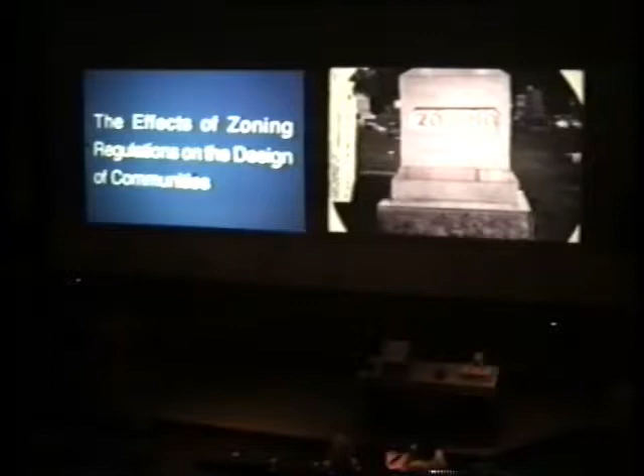The key is to understand that one of the major tools is going to be a zoning tool - not only a visual tool, but a way to encourage the kinds of actions we want to have happen.

Now, let me see if I can get this thing... I'm going to go back and see if I can get this straight. There, I got it. This is the vision.

The 1950s - kind of what we were supposed to become, and what we are. There's now more cars in America, probably as you all know, than there are drivers. This was kind of the image after the war of the suburban American vision.

I suspect the majority of you grew up in this vision. I ask undergraduate students - I teach one of those classes a year - what's a single word that describes the area in which you grew up? And that word is boring. To the point where I'd argue the majority of people who moved to the suburbs did not move there for the kids - they actually moved there for themselves.

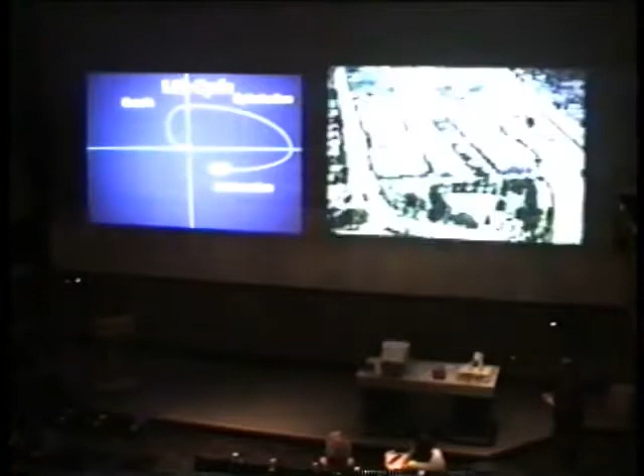Now, here's a classic for you. We work with a lot of major team structures across the country, and one organization we work with a lot is Cooper Carry. This is Boca Raton before—typical American shopping center, classic—and that's Boca Raton afterwards.

What happened is they leveled it. Both shopping centers, 17 to 19 years, leveled—they die after that period of time, and then start over again. Now they've got a main street, a plaza, retail at the bottom with housing above, retail at the bottom with offices above. It has transformed itself from the Euclidean zone of a single use into a multi-use place.

You're going to find that the majority of your work in your careers, I suspect, should be involved not with Greenfield projects but with what we call retrofitting. I think that's what's interesting about the complex geometry of deconstructivism. The only redeeming factor I can say about deconstructivism is that you folks will understand the complex geometries better than lots of other people will.

Now, the typical planning vision process we go through starts with an analysis of the physical, economic, and social—what we call the biography of the past. That's pretty normal, a clear biography of the past. But the biography of the past cannot exclude you—it's as important to understand where you came from and how you feel and what your background is as it is to understand the place you are building, designing, or analyzing.

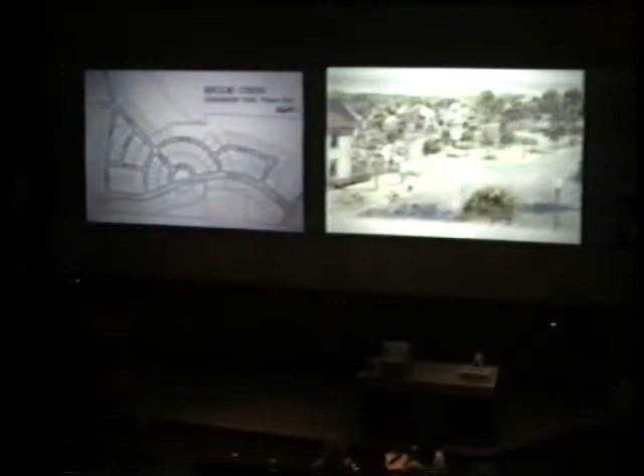You've got the right vision, you meet the road structure, we meet the street regulating plan, and we're on our way. This is the first phase of it, some of the first sketches that were done, and it's under construction. Now, what's fascinating about this one is that it took 9 months—7 days to complete the design, 3 weeks to do the rest of the regulation, and within 9 months we had it fully funded from the bank and under construction. 9 months.

Why does that happen? It happened because it was a collective vision of the folks who were there. And the banks felt perfectly comfortable with it because it seemed to relate directly, and we had people who were willing to understand that the design vocabulary wasn't something you just pass off.

It's wonderful for us to see the first phases of stuff go up, and of course there's nothing better than to see lots sold. That's really the best part of it. At different times of the year—some of these early plans were shot about a year and a half ago.

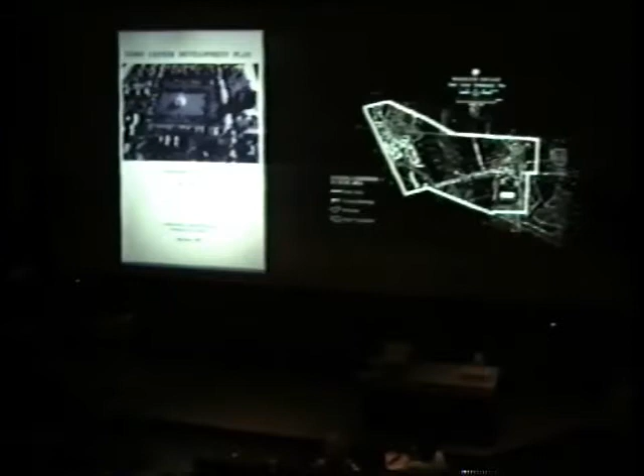Now I want to show you another one, cruder. This is really crude, like a $10,000 job. Slam dunk, this one. I mean, not all our clients are the Wilson Corporation. We take on a lot of clients who come to us and say, hey, we've got $5,000 or $10,000, and I say, well, okay, we'll take this one, or if the project is interesting—and you guys know that because you do all these wonderful charrettes here as well.

This was the one for Washington Township. Here was their vision. Now, those of you who've been to Lake Forest, Illinois, know what that place is like—the values there scored a 5.6. And they loved that place. They'd never seen it, but they knew intuitively that they really liked it.

And then there was some of the 6.3, which is a kind of new shopping village. And then, of course, the big one was the 8.7, which was the park. Again, you can always see that open spaces become critical, because the values of these will consistently begin to go up.

So what we did is a very simple set of things, but look at the comparison on the left-hand screen here. If you can actually see it, both of those images are the new stuff they've been building. One's a -2, one's a -2.7, and the other's a -1.6. Now, they built this stuff—this is in their code—and they did the survey, and it came out negative.

Now, what does negative do? Negative creates cognitive pain. When we ask people in sessions afterward, when you gave it a negative score, what's the single strongest emotion you felt? You know what it is? Depression. I feel sad. This place makes me depressed.

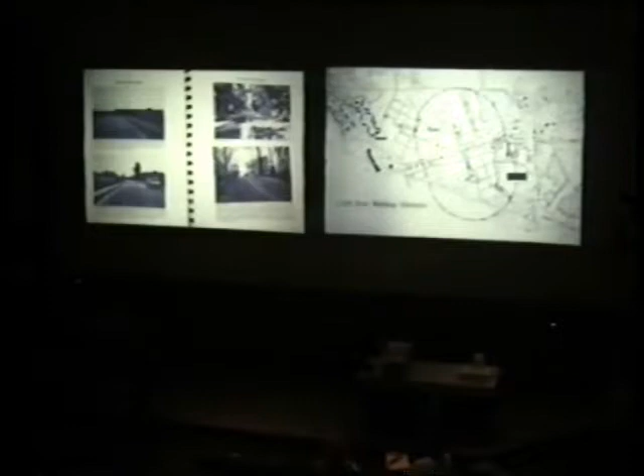So the question is classic as to why. Sometimes I ask audiences, how many of you are on Prozac? And I always get lots of people raising their hands. I think half of America's on Prozac.

But nonetheless, be that as it may—sketches of the preliminary layout, finalization of the design using little models, spiffing it up somewhat. But notice this one, if you will.

In the middle piece up there is their little main street. It dissolves into a square big enough to have a field in it. And what I thought was fascinating is this is a range of housing types, but they also wanted a religious building, a church, at the other end, and they also wanted a cemetery.

Now here's always my litmus test: if you've got a PUD that's got a cemetery in it, it probably is a real community. Do you want to get shipped away to some place to be cremated and set in a field someplace that's not related at all to the places where you've lived and grown up, or the churches where you worship? What happened to cemeteries next to churches? Well, they become parking lots.

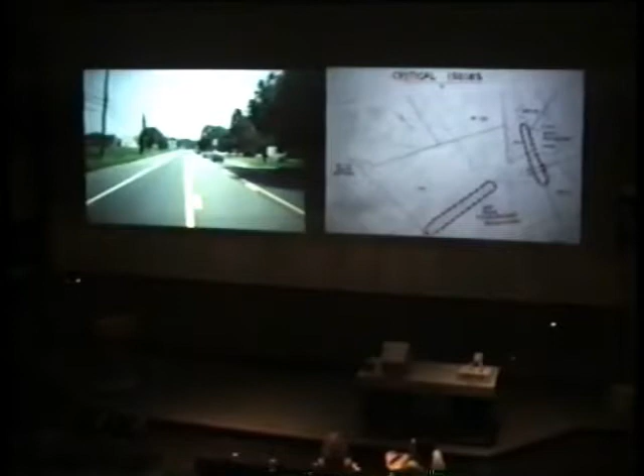So this one is a very simple one. This is the road in front of it, and of course this is a state highway. Now you're into the big hassles with the New Jersey DOT, and of course that was always a good battle.

And what we did on that one is simply a simulation—a computer simulation, before and after. That's all it took, this bottom simulation, to prove to them what that street could become. And we had converts from the New Jersey DOT.

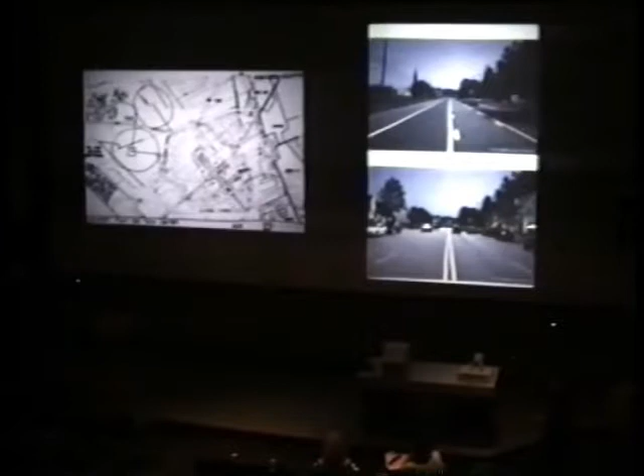Again, that's a computer simulation, and you guys probably know that stuff really well. This is the plan—again, the road structure is laid out, the street structure is laid out, and the fundamental location of the buildings is laid out.

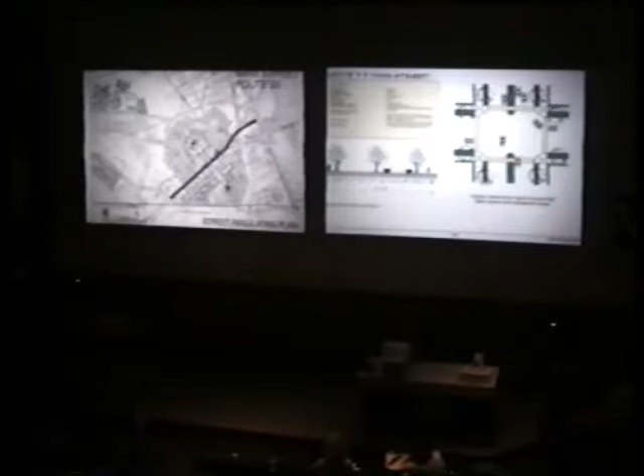Here's the typical ordinance itself. Again, color-coded streets, which are fairly simple and straightforward. This was a cheap document, so we simply did it in black and white. You just color them in to show where you want to go. The various street types are the same plan, done over and over again in the same overall character.

You can see how the street regulating plan evolves and how the streets develop because of that plan. Very narrow streets. We were really interested in very, very narrow streets. This one's in Portland. We liked it, it got really high on the survey rating. It's terrible, people can't pass, but it's the most human street there because cars have to stop to pass each other. In most cases you can't build a street like that because you're supposed to have two fire engines and a third fire engine passing at the same time for that street to work.

I was just blown away today when I came in here on a highway, 76 or 67, whichever it was. It looked like an airport runway, like the Cincinnati airport. And it had no cars on it, maybe two. I'm going, why are they widening this thing? Why are we wasting money on a road we don't need? Why?

Well, I'll say it's depression thinking, but on the other hand, guys like Rick Chellman are really making big moves with ITE and AASHTO to get these road standards changed. And it's happening, you can see it through here.

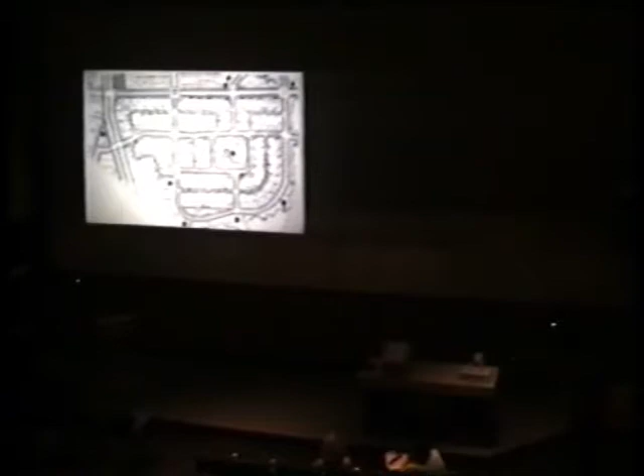That's the typical kind of boulevard section. And of course the ubiquitous alleys—we don't do anything without alleys anymore because you get the best streetscape off of alleys across the board. Even trying to deal with the highway system in terms of creating a boulevard, the highway was always a very critical one. Then I'll start to actually lay out some of the actual neighborhoods.

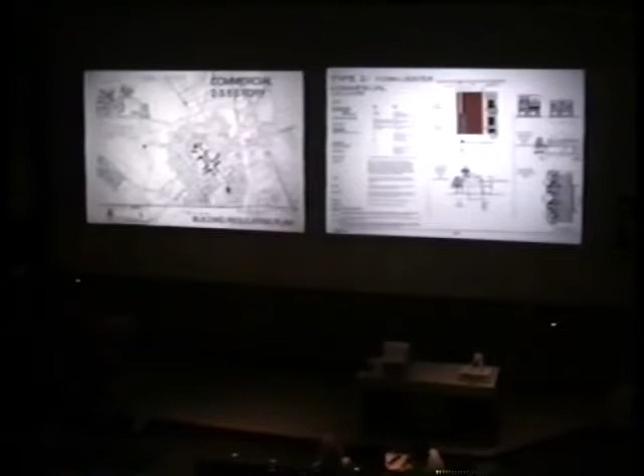It does have some of these numbers in it by nature, but you also begin to see these diagrams where you concentrate the highest density in the center. You see the building regulations here, and this was the commercial component. The whole thing was done in about 40 pages, lock, stock, and barrel, including the townhouse plans.

If you look at this carefully, you can do townhouses or garden apartments—several building types on the same street. It's not Euclidean where just one building type fits on a certain street; you can do multiple overlays onto a single street. The regulations look as simple as this, all one page, and you refer back to the design vocabulary. So that's a really neat part of it.

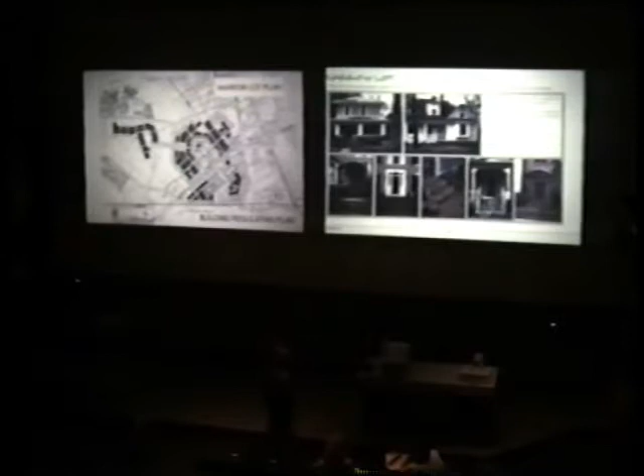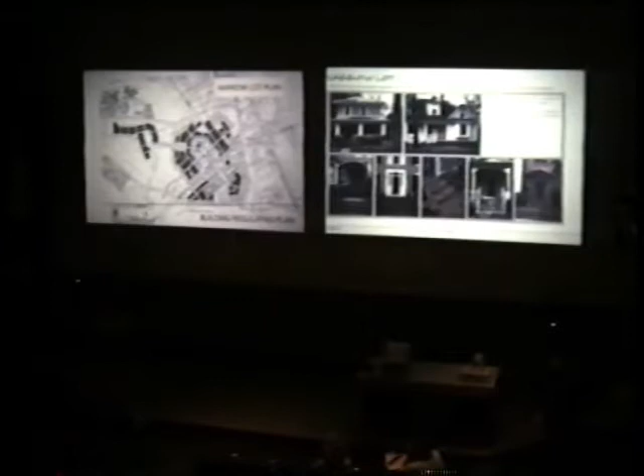You can see the narrow lot lines also fit where townhouses could work. It allows the market—if we get a great street with great trees and great sidewalks, and the market says it's better to move to townhouses than small single-family houses, why should we regulate what the developing community and the market says you should have? As long as you have great streets with great sidewalks, who cares, as long as we get the quality we want. So that becomes a slightly different way of looking at it.

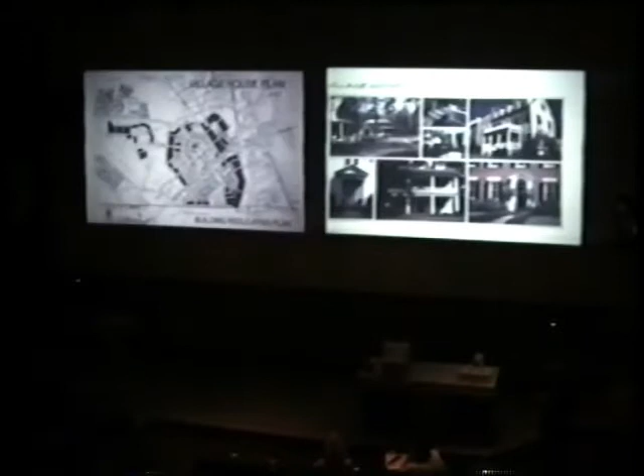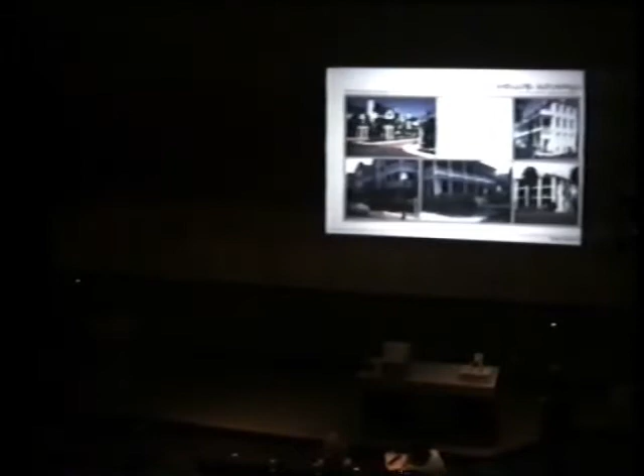They're always relatively simple in their overall configuration for each building type. The whole thing just goes on in this kind of configuration, whether it's senior citizens housing or whatever. What's nice is it all falls into a fairly simple, straightforward process that a lot of architects can then play with—it gives the architects creativity.

Now, you remember that top-rated image, that open space top-rated image? You can see that part of the open space now in the plan. So what happened is the people who actually rated these images can now see that image realized in their plan.

I don't see myself as a planner anymore. I simply see myself as a facilitator of other people's vision. We're just there to help them put it into place, and that's what I'm asking you guys to become involved in—giving the architects the most flexibility in developing the actual civic buildings.

I want to show you another project. This one was fascinating. We just finished Midtown Atlanta. Now, those of you who've been there know it's two-thirds empty parking lots with some very good signature high-rise buildings, but it's really a terrible place.

We went through a visioning process with them, but what was interesting was our working group included the chairman of the Federal Reserve Bank, every major developer, all the major bankers in town, and every major mover and shaker. We went out to the public, 2,700 people participated in the survey, and we held one intensive charrette that boiled down into a final set of design plans.

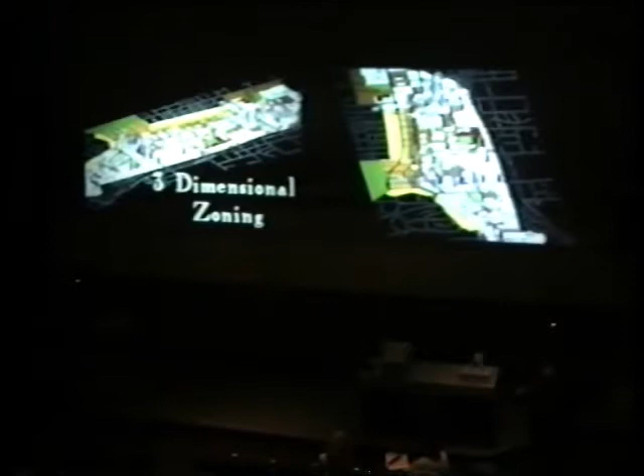But we're dealing with some fairly substantial infills of structures. So what we're doing now, primarily in Microstation with the major road structures laid out, it really starts to lay out where the various land uses and the volume into which things can be built, and then relates that back to a design vocabulary.

Starting first with the basic structure, here's two things we developed which I think are very important. This map essentially is what we call a susceptibility to change map. And if you remember nothing else from this lecture, the most important thing I can tell you is the development of susceptibility to change mapping.

Why is susceptibility to change mapping so critical? When we say susceptibility to change, we mean what things will change in the next 40 years. Top on our hit list, of course, is parking lots. There will be no more parking lots in the year 2050, so parking lots are highly susceptible to change.

One-story buildings are highly susceptible to change. Existing deteriorated structures are highly susceptible to change. Then you have highly, medium, low, and not changeable categories.

So you wind up with a map that has these four characteristics on it, and then you three-dimensionally volumetric all of the buildings which are going to stay, and you take this back to the community and say, do you agree with this? That's all the buildings in Midtown that the group agreed would stay by the year 2050.

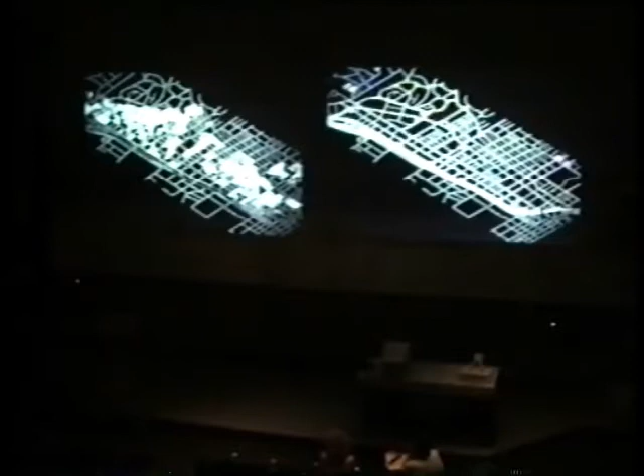Now what do we do with the rest of them? Well, obviously you go back to the visioning process, and that began to pull out things like major structure, where the major roads were going to go, where the major sidewalk configurations were going to be located, and then you started to infill it, primarily with housing.

All the yellow and brown here are low-density housing. They kept it because we went back to their maps and they said housing, housing, housing, and here was the configuration of the housing types. So for the first time you can see in this photograph three variations on the types of low-density housing they're looking for and where they're actually located in the plan.

So not only could you see them, but you could also see the volumetrics, and the volumetrics could relate to a photograph. So here's the synthesis that begins to occur by putting several of these kinds of pieces together.

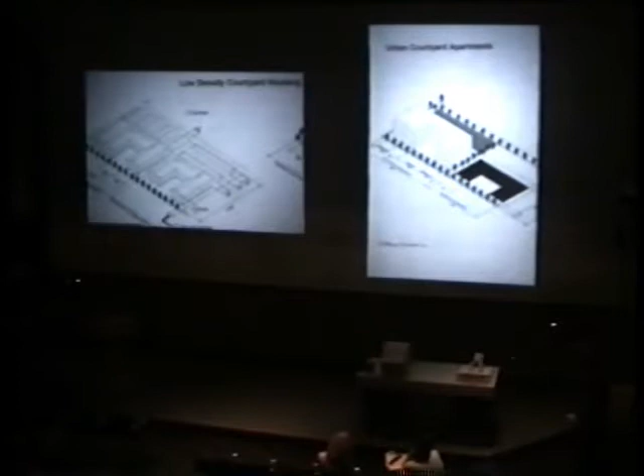And then, of course, you do these kind of diagrams - the typical floor plate diagrams, as simple as you can conceivably get. Here's the floor plate, here's the courtyard configuration, here's the height relationships, and here's the parking. Each piece of it can be pulled out in a separate extract.

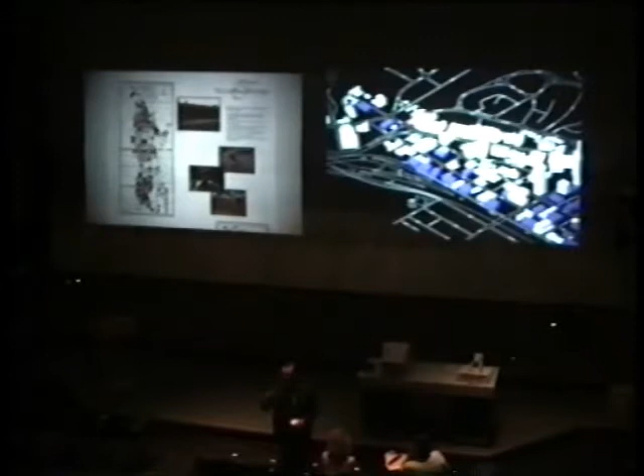Now what they'll do is pop the CD into a machine like this, and anybody who wants it can automatically pop up the zoning. It's all there for you in the volumetrics with the volumes already figured out, with the photographs to relate to what it is that they actually want, approved by the financial and development community.

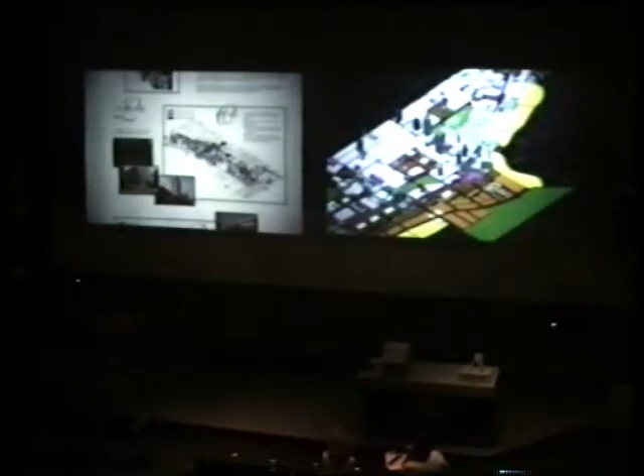Now this starts to get some things a little closer. That's a big green square in the middle, and it's really an abstraction. You say, well, what does that look and feel like? Well, of course, then we would default back to the actual imagery, and you can see some interesting variations, and the computer system now allows you to revolve around it as fast as, and wherever you actually want to go.

I'm going to show you another one. This one is now on your website - a 1,000-acre downtown Orlando project, the old Navy training facility. We won the competition against Andres Duany and Peter Calthorpe to do this plan. It was done with the visioning process of the community and a 7-day workshop that developed the whole plan.

The plan then went out for a set of design regs, which we developed, and then went out for an international bid competition, which will be announced on May 1st. 4 international bidders are bidding to build this thing right now - the whole 4.5 million square feet of non-residential use and 5,000 housing units, one master developer, in one fell swoop, right in the middle of the city of Orlando.

7.5 months to do this one. Why it works so well is you've got complete buy-in from the neighborhood and community group because they helped us design it. Again, using the same kind of process, using the lakes, you can see some of the major connections. There's a digital photograph.

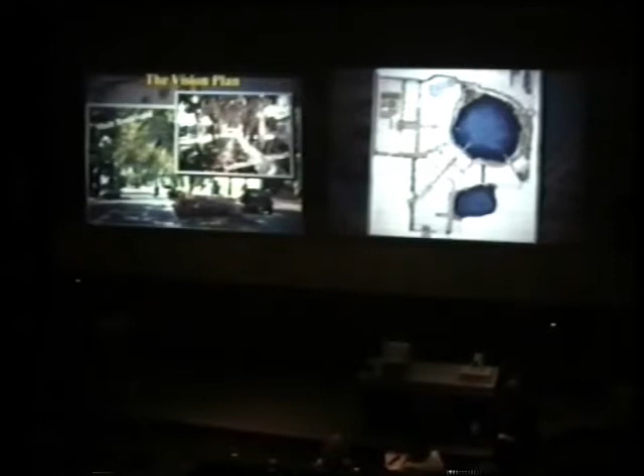Stick it into Photoshop, take off the pieces, gray them down, and all of a sudden you've got the boulevard structure. Reverse the system in Photoshop, and you've got all the building configurations. Reverse it again, and you've got all the road configurations. One digital photograph, one set of Photoshops.

Again, the technology you kids have available to you has never been available before. I mean, it would have taken us years to do this stuff.

And then you come into the sets of plans we're developing now, which are really the required road structure. So this is the minimal road structure - every developer had to do this as a minimum. If you did the minimum, you could do it. If you did the next suggested level, and if you did the total package, we'd give you instantaneous approval. So they had 3 choices of optimization on the various pieces.

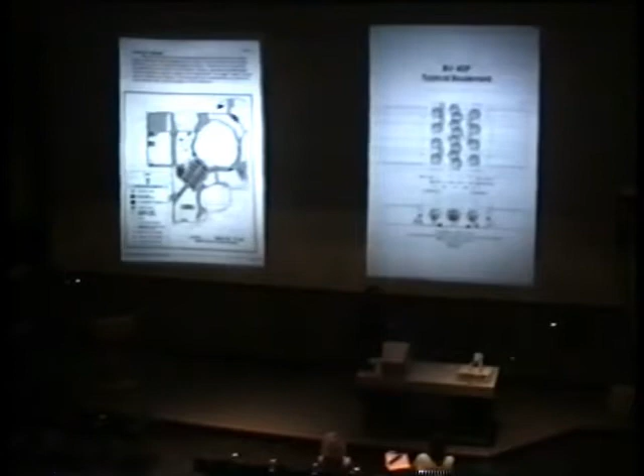And you may not realize this, but these are Rick Chellman's sections of the street type - he's one of the foremost new traffic engineers in the country. You can see there's a level 2 and a level 3. The optimization of the plan - if you did that plan and that configuration with those road structures, essentially as it was laid out, it would have gotten instantaneous approval.

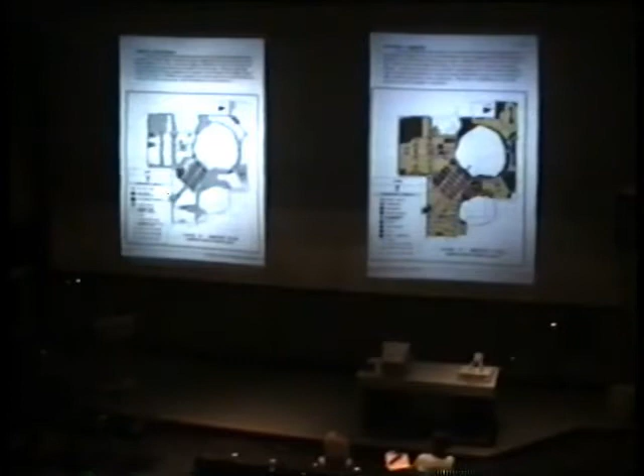You could start building 2 weeks from now. So it's the ways in which planners and architects are really playing a kind of role they've never played before. And this is the way the plan was presented - it was done essentially in PowerPoint and Photoshop, and it was all done kind of instantaneously.

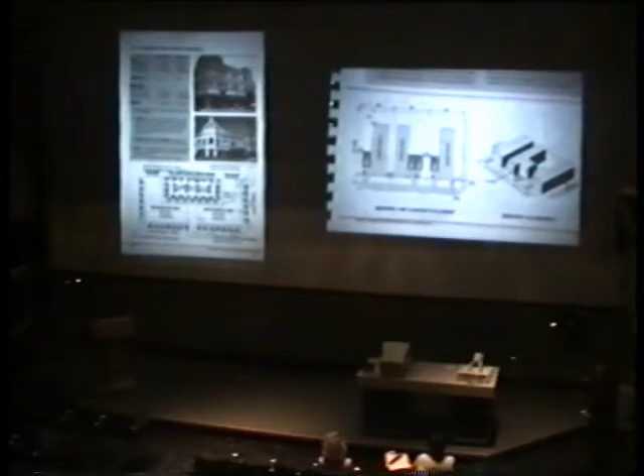Again, by the end of the 6-day charrette, all these images were done, of course downloaded from lots of other places. And then this was what the design regs looked like - sets of photographs and kind of volumetrics.

I want to close on one last project. This is a project we're working on in South Africa - this was a 2-week project. This is a town, and what's interesting about this one is that they hired RTKL out of Baltimore to do a 3.5 million square foot shopping center, and they hired us to do the rest of the town.

And this was done with a team of about 60 people, in a very short period of time. What we did in order to convince them of it, after going through 2 visioning sessions there, was to actually create the 3-dimensional model as a way of beginning to translate the vision directly into a 3-dimensional vision of what the town could begin to be.

I go back to this old notion of working with these models, which I still find quite old-fashioned and really quite wonderful, like the view boulevard here, for instance. Making a boulevard that for the first time just didn't go straight, but splayed out at the end, so that any place along that boulevard you could just see for miles. That notion of being able to sensitively look at that with whatever tools you've got, it became clear to us that people loved these long views.

It was almost like when you're talking about filling in the proportions of space, the 1-to-1 is a wonderful notion. But what's really sacred to most people is 1 to infinity. That view is the closest thing to a spiritual revelation you're going to get. So we said, well, what happens if we made this a boulevard where you can overlook these hills for the next 50 miles?